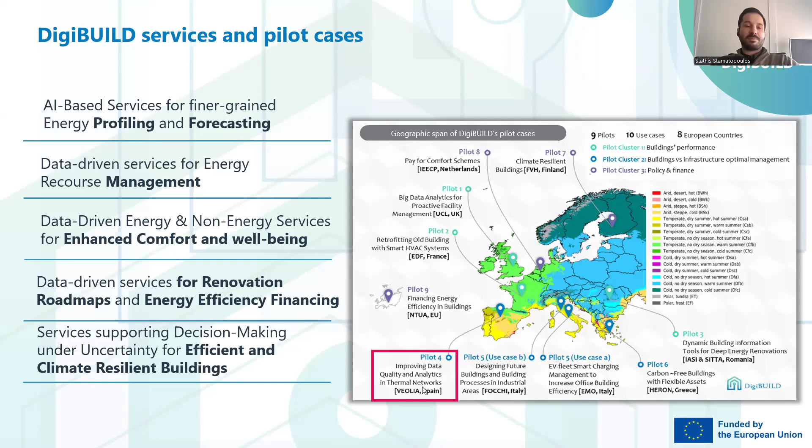The purpose of my presentation is to introduce you the Spanish pilots in DigiBUILD, improving data quality and analytics in thermal networks. We're going to talk about the details of 2 pilots, FASA in Valladolid and Rio Vena in Burgos, both in Spain, where we will explore how we can improve, as I said, the data quality analytics in thermal networks. Both sites operate a district heating network and have implemented an advanced management system, including building management system, energy management system, and district energy management system.

On the one hand, at FASA, the district heating network has 20 distribution substations, 20 buildings that provide heating and domestic hot water to 398 households, fueled by 2 biomass boilers and 1 gas boiler. So in total, we are using 90% biomass and 10% natural gas.

And on the other hand, at Rio Vena, the district heating network has 23 distribution substations that provide heating and domestic hot water to 706 households. And in that case, this district heating is fueled by 3 gas boilers with a capacity of 13.5 megawatts using only natural gas.

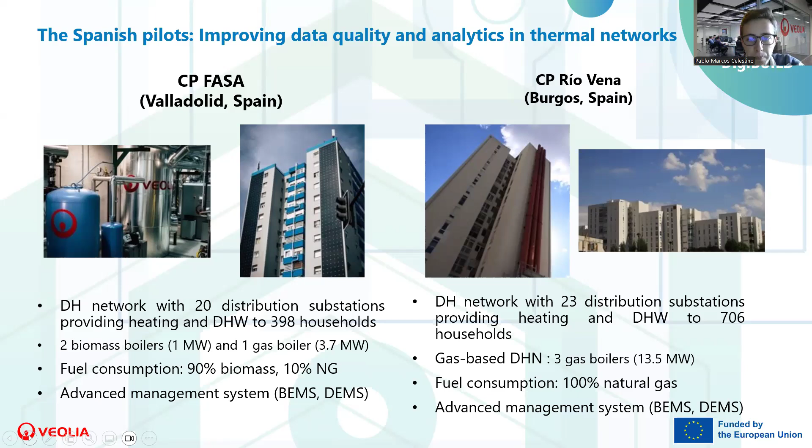Next slide, please. Okay, so in the next slide, we show more in detail the characteristics of one of the pilots, FASA, which has 3 independent circuits to supply heating and domestic hot water to each of the buildings. And it also shows the schema that the photovoltaic system provides a small contribution to all the residents of the district heating, not only to the users that are living in the FASA tower, which is the bigger building in the right of the picture.

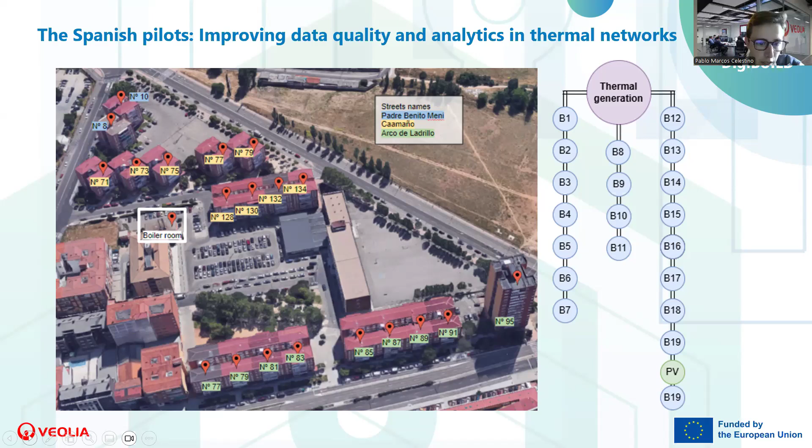Next slide, please. The 3 boilers of the production plant are internally monitored by Veolia, as well as each of the substations, whose component layout is basically the same, which is the picture on the right, excepting that the tower includes the photovoltaic system and the water tank with the 8 electric resistances.

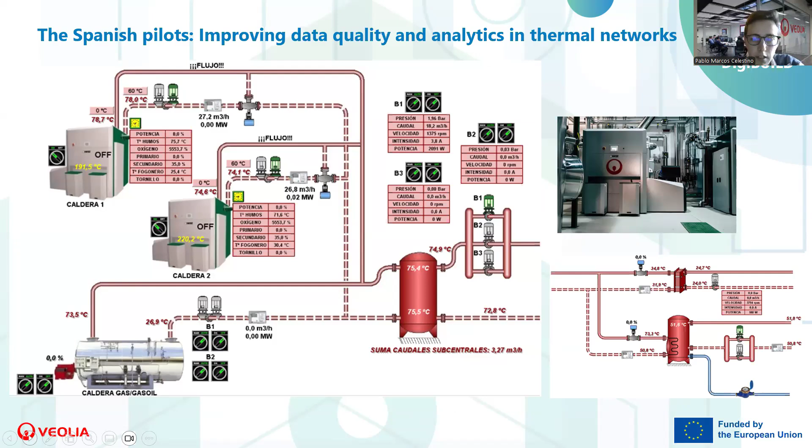Next slide, please. Okay, now with this schema, the substation layout, considering the FASA tower, we can see the supply circuit, which is the red arrow, and the return, which is the blue arrow. This is interesting because it serves as a link between the production plant, from where we come, on the left, and the user's utilization of both heating and domestic hot water, which is on the right. So in this layout, we talk about the primary circuit belonging to the heat network and the secondary circuit belonging to the specific building.

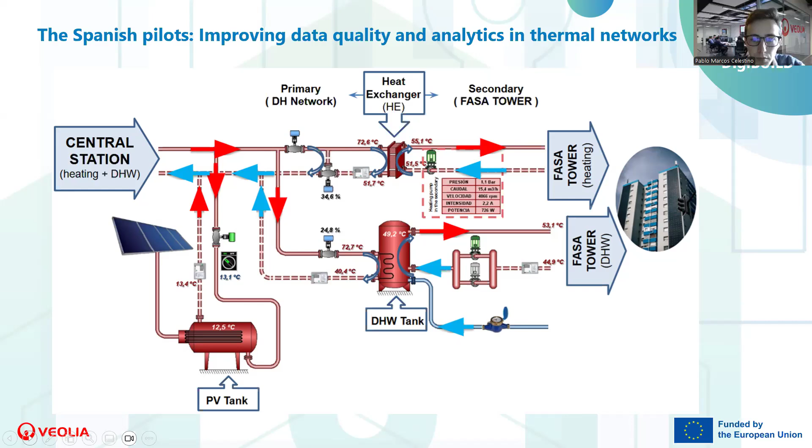Next slide, please. Okay, so regarding the data sharing possibilities, we have historical data available in Veolia's Hubgrade, which are the smart management centers for our water, energy, and waste business lines, allowing Veolia teams to monitor and optimize management of resources of their clients, and using it through our SQL database. First one at CP FASA since November 2018. We are using 768 variables with a monthly size of more or less 290 megabytes.

And here our new feature is this. In this project, we are able to share CSV files through an SQL download that connects to our Veolia's Hubgrade, and subsequently we are able to send those files to the SFTP server that is currently being shared with engineering and CARTIF. Moving on to Rio Vena, the strategy is the same, but we have collected data for 11 variables since week 17 of 2023, because previously we had only 4 variables, which are the cumulative energy and volume and operational hours from boilers 1 and 2.

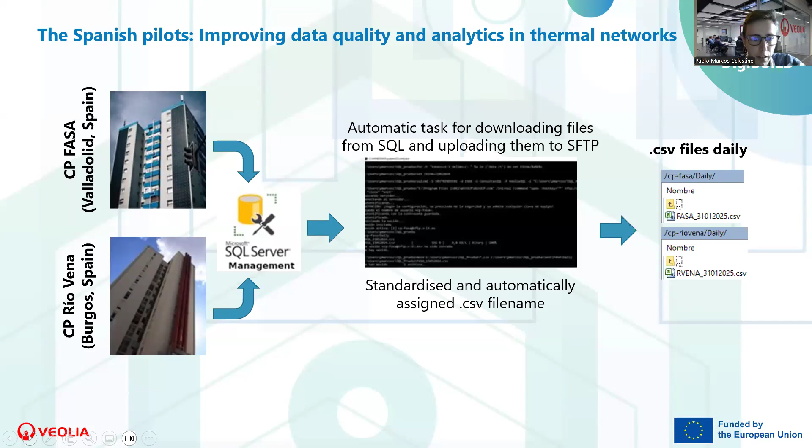So thanks to this standardization of this process, it allows us to share files monthly, weekly, or even daily without too much effort, although we have to continue working on being able to share data in almost real time. That continues to be our biggest difficulty internally, but in terms of DigiBUILD's project, there are not any difficulties or risks associated to our pilot. Next slide, please.

Regarding the demonstration activities, the first service is interoperability in order to improve data quality in the Hubgrade, Veolia's Hubgrade, by consolidating data sources in the current energy businesses of thermal networks. And then we are introducing 3 specific services that will increase our project capabilities.

First of all, a district network production forecast will play a vital role in adapting energy consumption based on external variables such as weather forecasting and internal variables, I mean historical databases or sensor inputs, and simulations, on the other hand, based on digital twin.

A second service is a district network production economic optimization that selects the optimal energy source based on performance and cost. And moreover, in order to ensure data quality and provide useful data, we will develop a district network digital twin, which will act as a dashboard for data quality report.

So by approaching the capabilities of digital twin and the rest of the services, we can simulate different energy management strategies, enabling us to evaluate and fine-tune our approaches to further optimize the overall performance of the district network. So, all in all, we can improve our ability to make data-driven decisions and optimize energy management with the district heating network.

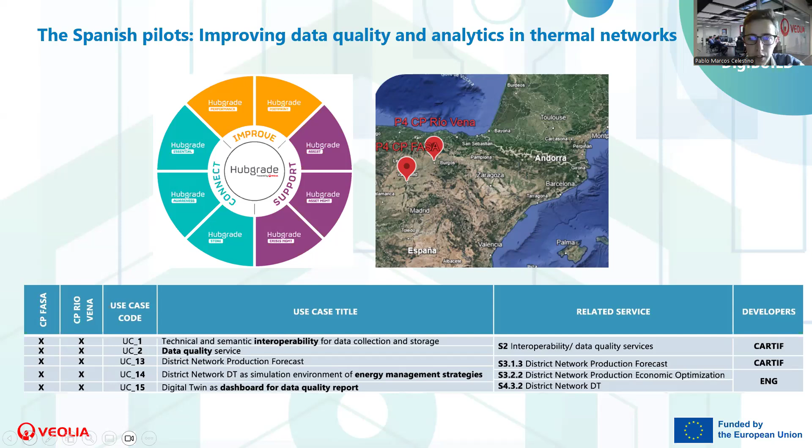That's all from my side. In the following slides, my colleague Jose will explain in more detail the services that CARTIF has developed. Thank you very much.

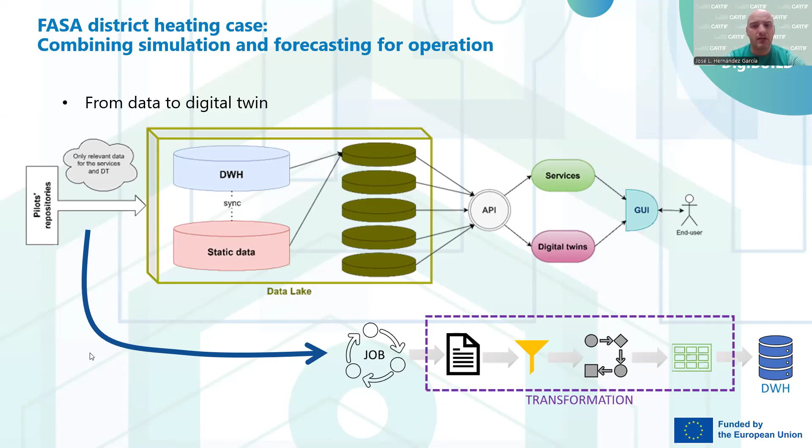Basically, we have an ETL, an extraction, transformation, and loading procedure that is based on a job that automatically collects the data from the low-level interface from the pilot repository that Pablo showed before. And we have a transformation that transforms all this data in a common format, as I mentioned before, in order to be stored in the database. So with this, we assure that all the data from all the pilots is in a common way and can be enriched with the static data that I mentioned before.

So just to show you an example about how this transformation is being made. We have a set of blocks that are doing some functions using the data set that we have. I will not enter into the details about how this transformation is working, but just to show you that the way of transforming the data is based on different steps that convert all this information, not only having the information that we have in the different data sets, but also obtaining some metadata that will be used for the static information that I mentioned before.

That is very important to enrich the data. So we are able to extract also metadata from the original data set that we have in the pilots whenever this is available. So just to show you the sample of this case.

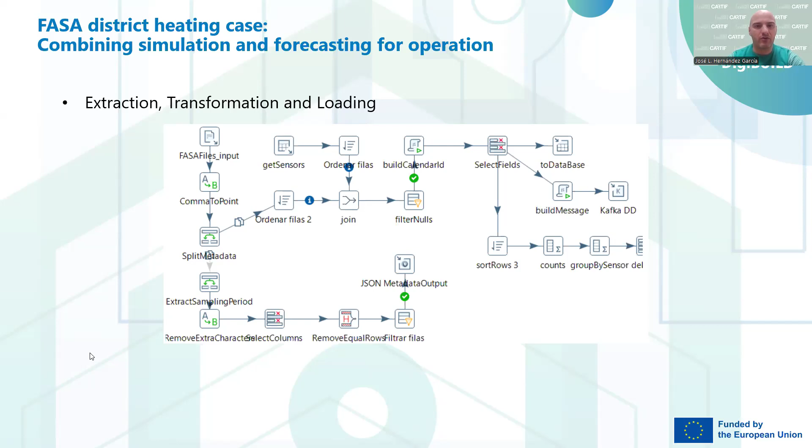And as I mentioned before, the digital twin of the FASA district is composed of a couple of data sets. First of all, static data. In this case, static data is the driver that we have for the digital twin, using a CityGML-based model. So we model the buildings, but also the district heating network, as you can see in the snapshot.

So we have the circuits, we have different pipes, we have buildings, the boiler system, and how we connect all the different elements. So this is the way that we enrich our time series database. And on the other hand, complementing the schema that Pablo showed before, we have the dynamic data that is being collected from the system.

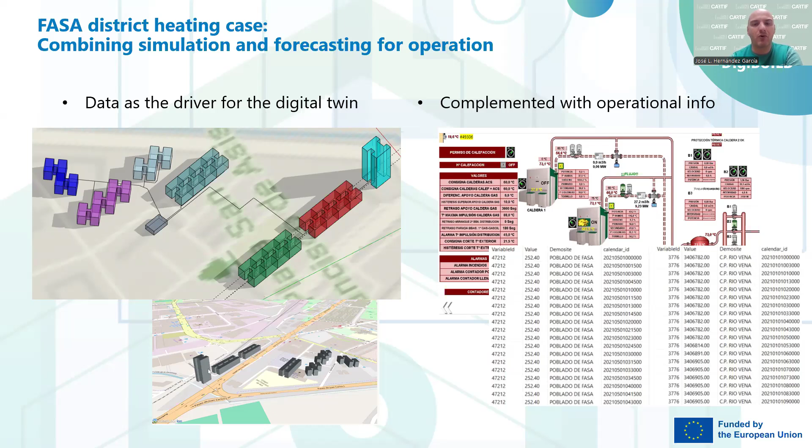So we have the combination of both data sets in order to have the complete data for the digital twin. So basically, we are using, of course, the operational data as our data-driven approach, but using also the static information, the different topology of the network, that will be our contextual data to enrich this information to have a more accurate digital twin and services applied in the FASA district. So with this, we have this approach.

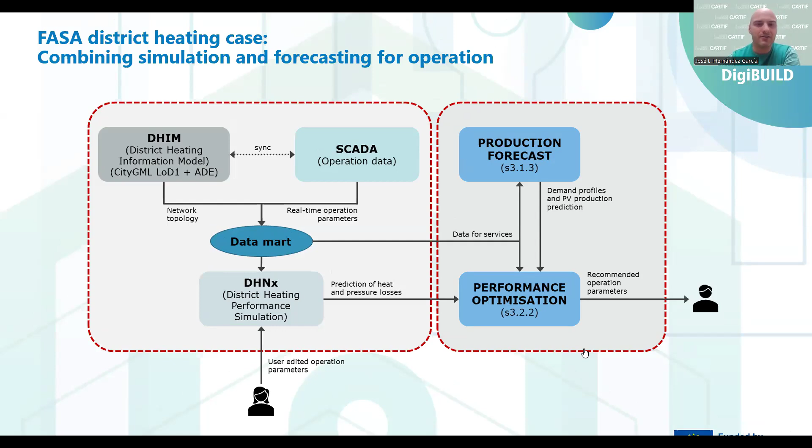Until now, I have shown these two parts, the district heating information model and the SCADA, that is the operation data. It is worth mentioning that both are synced, because we have different IDs of the devices in the system that connect the static and the dynamic worlds in order to assure that the data is unique, coherent and consistent. All this information is composed in a data mart, as I mentioned before, following the data lake. So basically, these three components are the main components of the data lake.

And thanks to this information that is using the network topology and the real-time operation parameters, we are able to simulate the network. We are able to obtain the different heat and pressure losses that we have in the network, and also predict these thermal and pressure losses in the system, because sometimes this part is neglected, but we are introducing these aspects within our digital twin, because we should take this energy into consideration in the generation system, since we need to cover the demand, but also the losses that we have in the network.

And on the other side, we have the demand and production forecast, that is composed of two different functions. First of all, the demand that we have in the buildings, so predicting the needs of energy that the building will have in order to cover the comfort levels that we should assure. But also, as Pablo mentioned before, they have a power to heat system based on a photovoltaic system, and we are also predicting the contribution of this renewable energy.

So basically, at the end, in the optimization service, we have the demand profile from the buildings, the PV production prediction from the power to heat system, and also the prediction of the thermal losses. So having all this forecasting of the systems, we are able to optimize, based on an algorithm, the use of the boilers. Basically, the set point of the boilers and the use of the inertia thermal tank they have in the system, in order to provide recommendations to the operator to optimize the use of these boilers.

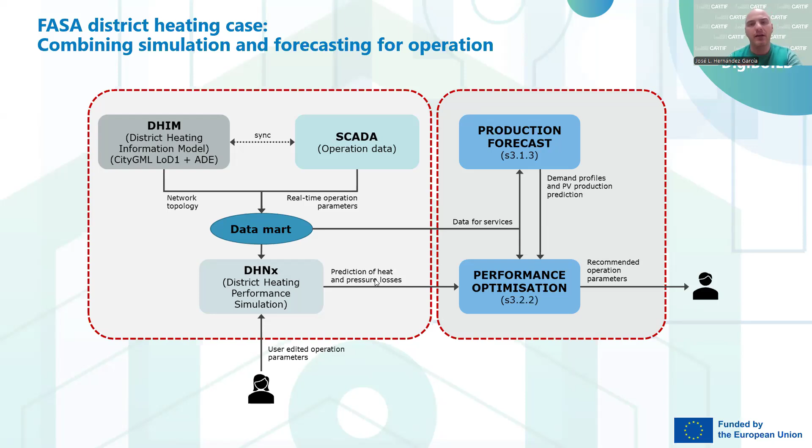So having this cocktail of different elements, we are able to provide optimized or optimal parameters in order to operate the network from the facility manager perspective. And just to conclude with my presentation, I would like to show you a couple of snapshots about the digital twin of the FASA district heating.

So basically, this is the main screen that we have in the system. So we have the buildings that are part of the digital twin. On the right side, we can see the red building that is selected in this case, with the different information that we have from this building, like the cadastral reference, address, the built area, heated area, the window facade, and the energy demand of this building according to the energy performance certificates.

And also, not in this snapshot, but in the new release, we can see also the forecasting of this building. So the facility manager, in this case, as final user, will be able to see also the 24 hours horizon of demand for this building.

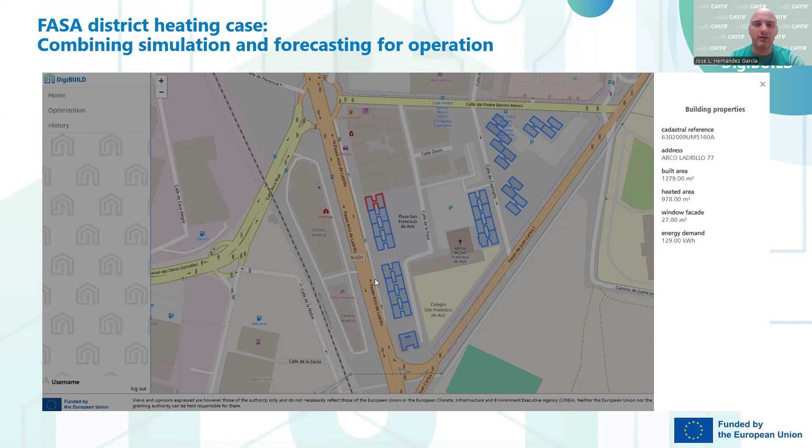And the second screen is about the optimization part. Basically, the user will be able to provide some information about the scenario, like the cost of the energy for biomass and for gas, the set point that they want to apply in the boiler, the set point for comfort and so on, and the system will optimize this energy, providing the results in different ways.

Here in the screen, we can see the simulation results about the different circuits of the system, the heat losses, pressure losses, and so on. This is a simulation; I will not focus on the results, because maybe the numbers are synthetic numbers that were generated. But it provides the information to the facility manager, and also, not shown in the screen, the recommended parameters for the operation of the boilers.

So basically, all this information is like a bidirectional communication with the user, providing all this data to the user. So with this, I conclude my part, and I would like to pass the floor to Leandro, who will provide the next part about the Rio Vena district. So Leandro, the floor is yours.

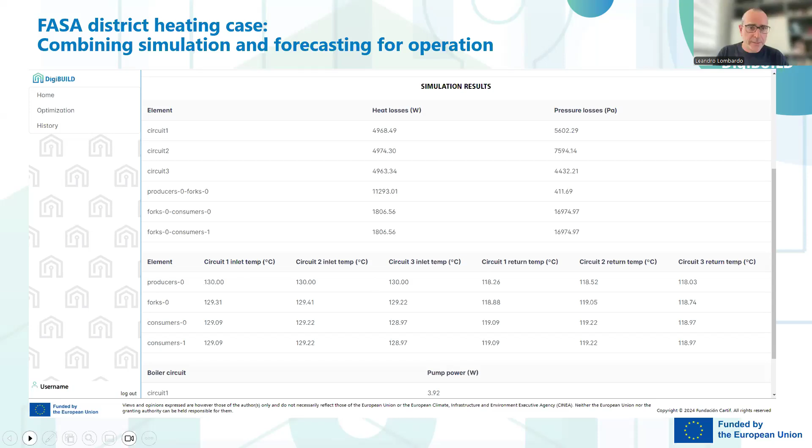Thanks, José. Good morning to everyone. This is Leandro Lombardo from Engineering Ingegneria Informatica. Today, in this last part of the webinar, I'm going to present the digital twin that will be implemented for the Rio Vena district heating case.

This digital twin allows the district heating network manager to boost district heating management, optimizing the heating power. In particular, the Rio Vena digital twin can be considered a support service for the district heating network in order to guarantee operational efficiency and also saving costs, reducing, as a consequence, the CO2 emission. This digital twin allows the manager, that is the end user, to have an overview on the state of the district, and also provides him with strategies aimed at optimizing the consumption of the gas used for heating the district.

Next slide, please. Like for the FASA heating case, as it is possible to see from this image, the process for the realization of the digital twin started from the collection of pilot data. I want to point out that only the necessary data are collected to create the virtual replica of the district and also to run services.

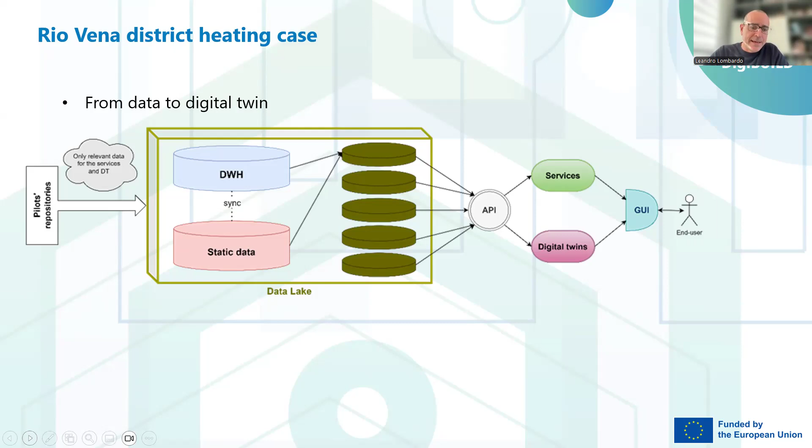So here we can see the I/O schema for the optimization services. The optimization service is the core component of the Rio Vena digital twin, and this service is meant to work as a backend service, supporting the functionalities of the Rio Vena digital twin.

In this sense, to improve ease of use and also a good user experience, no user input is required from the digital twin user interface, and all required data are automatically taken from the DigiBUILD data warehouse through an intelligent query system. About the data, we can see on the yellow square that we are taking into consideration several historical data like boiler temperature, natural gas historical consumption, working hours, boiler energy, delta T boiler, and so on.

These are only an example of the possible data that we are collecting and using in our digital twin. On the right side, we have the core component, our services, that is made by two submodules, let me say: the machine learning models that estimate boiler efficiency, combined with an optimizer function that calculates how to minimize the natural gas consumption.

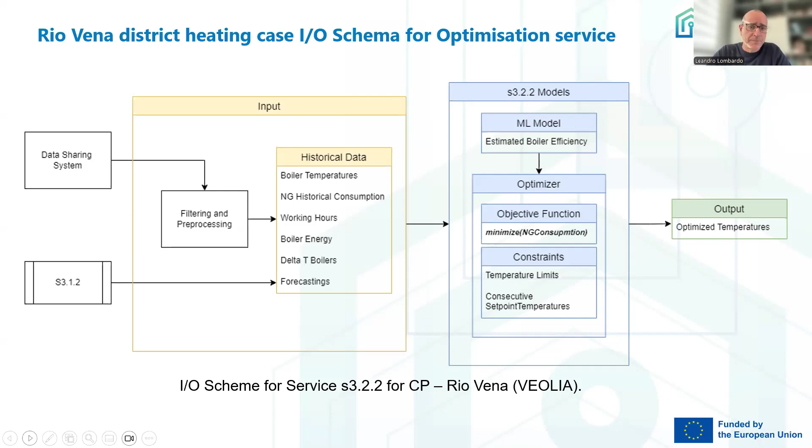The result is a series of optimized temperatures that the manager of the district can apply to the boiler to save cost. Next slide, please. So here we have a few screenshots from the digital twin user interface. On the left side, we can see the dashboard, an informative dashboard that shows the manager several parameters within the district via specific graphs. The manager can do specific inquiries on the available data.

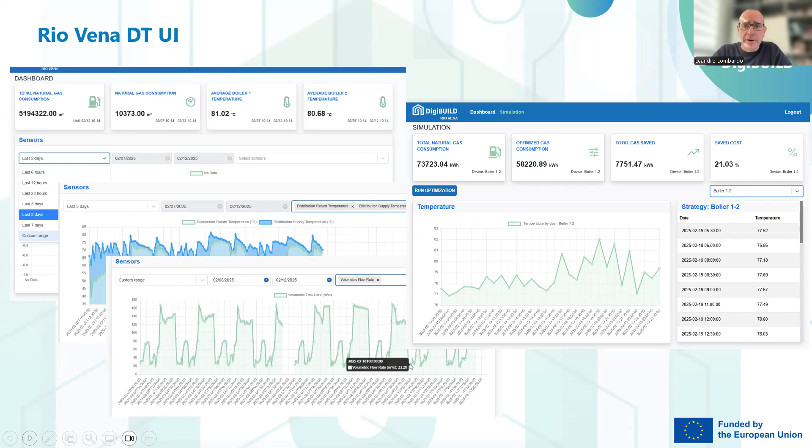And on the right side, the simulation page. The simulation page is the part of the digital twin where the manager can run the optimization services, which in any case are executed every night, to obtain a series of possible temperature strategies to be applied to the boiler of the district. Next slide, please.

Last but not least, I want also to point out the maturity level of this digital twin. We took into consideration as a maturity level the definition of the Institution of Engineering and Technology. We can say that this digital twin achieves a level of 3 in this range, because it cannot directly control the district heating network plant, but provides strategies to be applied to the boiler temperature.

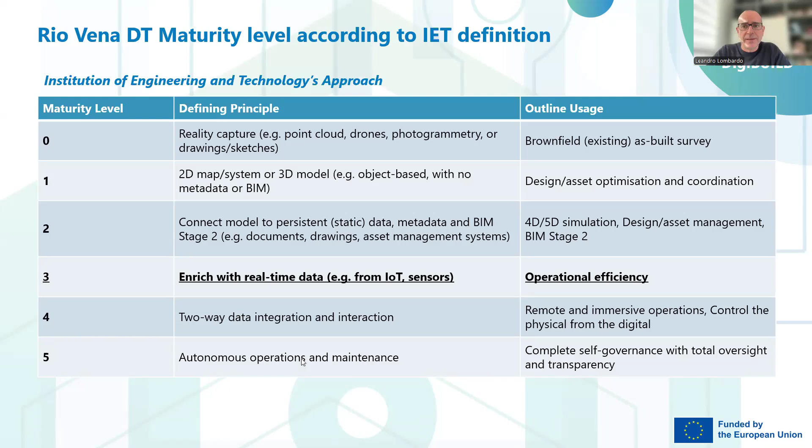And level 3 is also guaranteed by an automatic data stream, even with daily frequency, to provide data from the real world to the digital representation. So next slide, and now we will have a video with the demo of the digital twin. So please, let's go with the demo.

Here is presented the digital twin implemented in the context of the DigiBUILD project for the Rio Vena district in Burgos, Spain, a Veolia pilot site. The digital twin is designed to provide optimal management and operation of the district heating. The digital twin is accessible via the DigiBUILD toolbox, which contains all the major project results in terms of services and digital twins. On the left side of the toolbox it is possible to access all available digital twins created for the DigiBUILD project and choose the Rio Vena one.

The digital twin authentication page is presented to access the digital twin. The user can then access the service using his own credentials. Access credentials are provided in the context of the DigiBUILD project by an admin who manages and controls them, acting on an authentication system based on Keycloak.

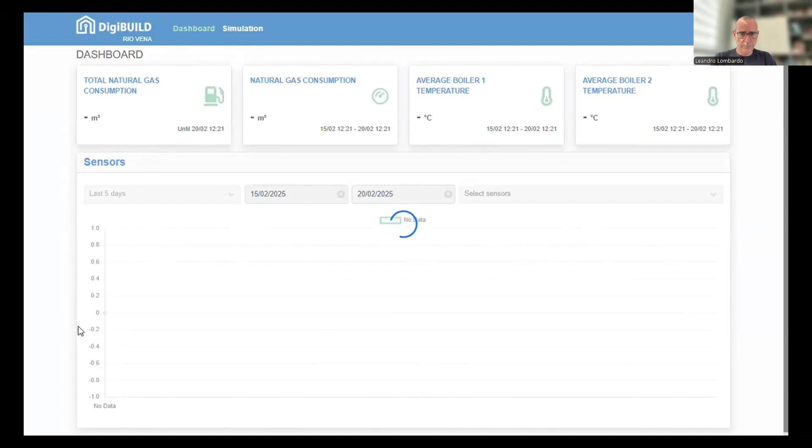After logging in, the authorized user is redirected to the application composed of two different pages: the dashboard to monitor the status of the district, inquiring, visualizing, and combining historical pilot data coming from different sensors, and the simulation page, core component of the digital twin, where it is possible to run the optimizer engine to obtain strategies on temperature to apply on boilers to optimize the heating power.

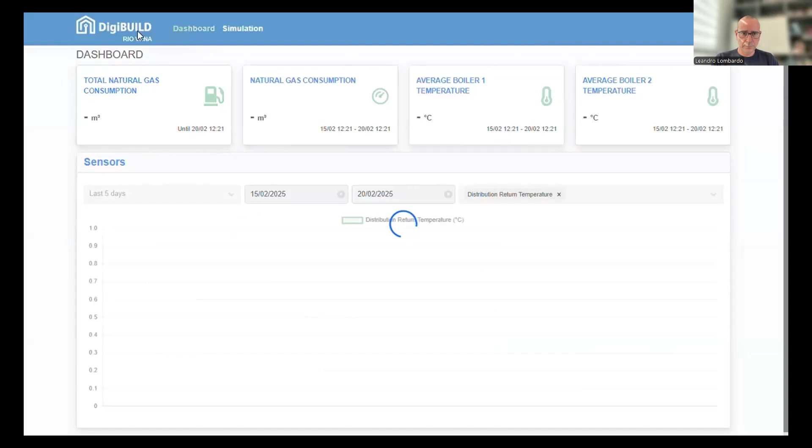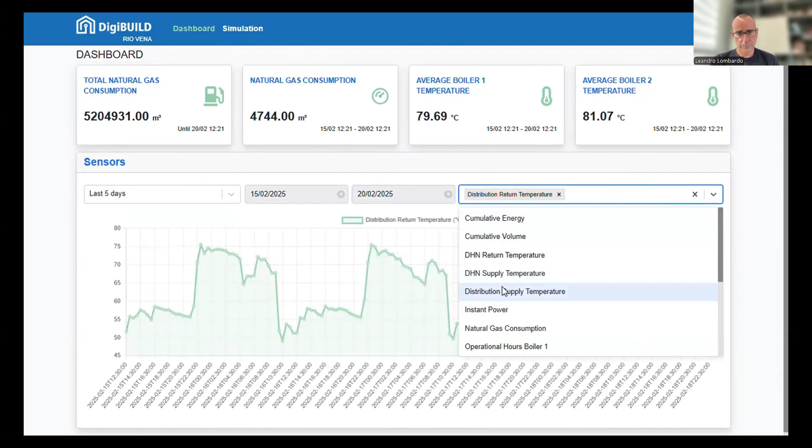Starting from the dashboard, the user can choose the period and type of data to be displayed. To choose a time range, the user can select some default time ranges from the time drop-down box that offers different granularities, starting from the previous 6 hours and going back a week, with the possibility of setting a customized range with start and end date. For the type of data to show and compare, the user can choose a sensor of interest or select multiple ones like distribution return temperature, distribution supply temperature, natural gas consumption, volumetric flow rate, and so on.

At the top of the page, relevant metrics calculated from the received data are displayed, such as the total natural gas consumed until the chosen end date, the gas consumption for the selected period, and the average temperatures of boiler 1 and 2. As it is possible to see here, some examples of data visualized and compared about the distribution return temperature and supply temperature for the last 5 days are shown.

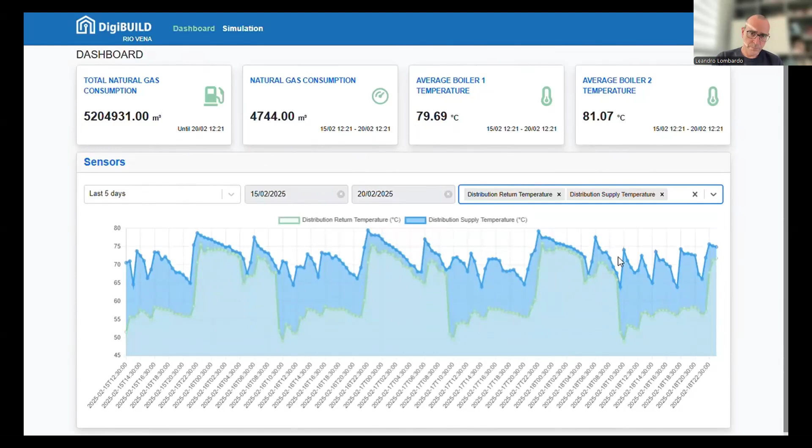Here's another example where a custom date range, defined by a specific start and end date, is used to analyze data, such as the volumetric flow rate, over that period. This approach can also be applied to any other sensor of interest.

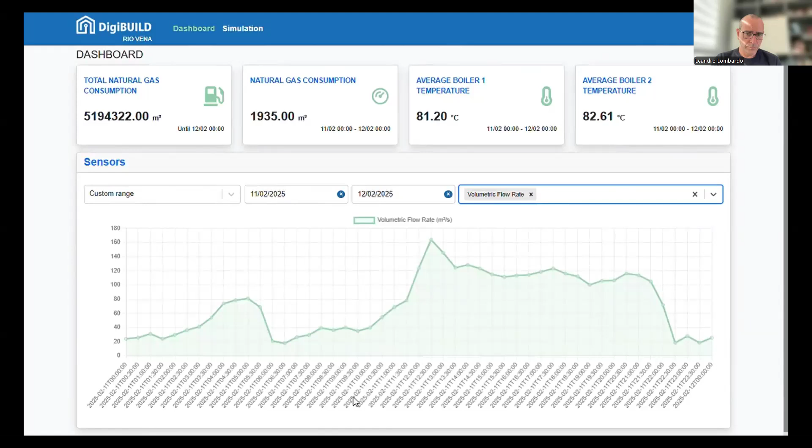All these metrics allow the district manager to have a clear understanding of the benefits of applying the optimized strategy, which also implies the reduction in CO2 emissions.